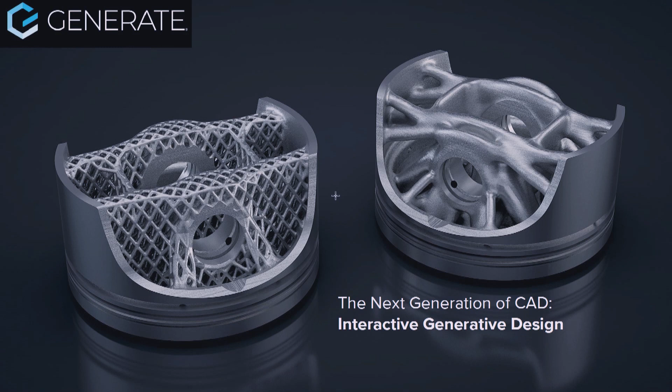So what I'm going to talk about today is how to make generative design interactive. It's a new paradigm of designing, and we're just scratching the surface. So we're really pumped up to show this to you. And I'll try to get through these slides pretty fast so that Kevin can start showing it off. A little bit about us. Yeah, we're in Boulder, Colorado. We're funded by a wonderful angel investor and also Next47.

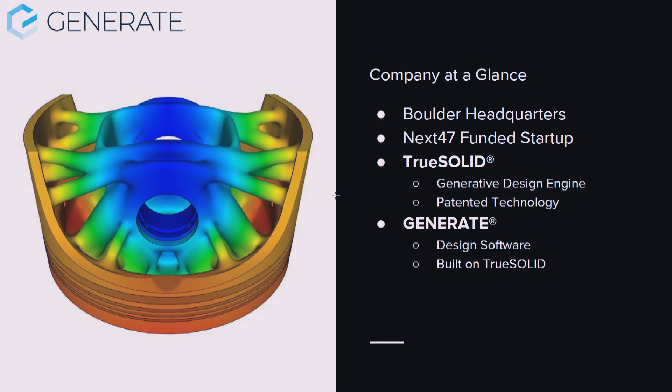And we have a patented technology which is called TrueSOLID, and that's our generative design engine. TrueSOLID is, at the heart of it, an implicit modeling kernel, which you've heard a little bit about today. And we definitely have some nice IP around that. Generate is our point solution product, and that's like our sandbox for experimenting with how to change the way we design things with generative design. It's built on TrueSOLID, and we just kind of differentiate between these two brands so that we can keep some sanity as we move forward here with the different technologies.

But what we're really after here is not just making it interactive for the sake of entertainment and playing with the design while it's being generated, but making it functional. And that's why we've created our own geometry kernel and generative design engine, TrueSOLID. The output from TrueSOLID is 100% manufacturable, whether you're using a 3D printer or if you're going to go and cast the part or mill the part. And we have constraints for all of those. So we're not just going to be showing you additive manufactured parts today. We're going to show generative design for milled parts, cast parts, and additive as well.

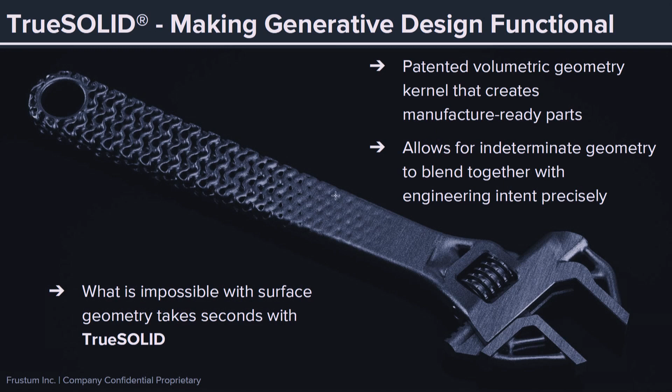So I think you'll see with this wrench design here, it'd be very difficult to model that with traditional surface-based geometry. So the idea here with making it interactive and using this new geometric representation is that you get a functional part right away, and it's your design process. It's not just automated.

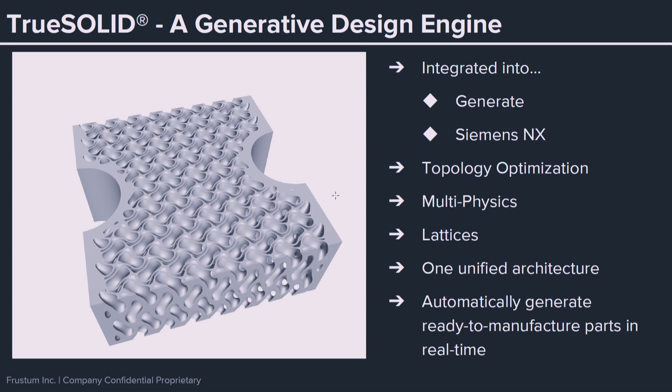And you can make amazing things like, for instance, this heat exchanger here. One of our larger customers in aerospace, who I can't name, sorry, I've got to go back one, is doing some really fantastic work with these types of complex structures that have unique performance capabilities that we're just scratching the surface on. It's a multi-physics system, so we do simulation too. It's all multi-threaded on CPU and GPU. And it's for that, giving you this more interactive and real-time experience.

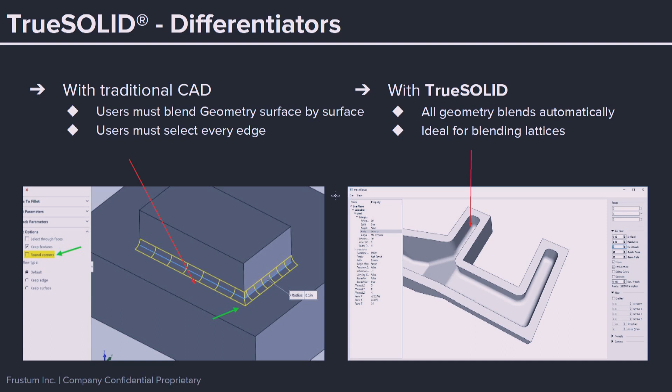So just a little bit about what's so different about traditional 30-year-old CAD geometry kernels, which are surface-based, and TrueSOLID. If you are using traditional CAD, you know you have to select edges to blend between geometries. But that doesn't work when you have thousands of lattices or struts or complex structures like this gyroid from the last slide. It just breaks down because you can't go in and manually select all of those. It just wouldn't work. So with TrueSOLID, you can apply blending between volumes without selecting them.

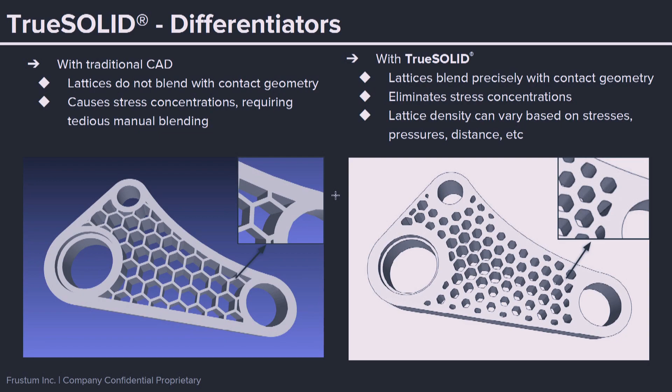Additionally, in the current state of the art right now, if you use traditional CAD, you're going to get these seams here, which would have to be blended if you want to get stress risers out of the part. Whereas in TrueSOLID, all that blending is just a parameter which you have total control over. So in a new way, it is parametric, but what we would just call functional design. So it is functionally parametric. You specify functions by parameters, and you get the design that it is providing for you.

We're all familiar with topology optimization. There's so much debate about what's generative design. Does generative design have to be on the cloud? Absolutely not. That's our position. So does generative design have to be on a local computer? Absolutely not. You could run it on the cloud. The reason for choosing one or the other is not really our debate. What we are saying is we just want to leverage all the computing power we have and use it for

the best purpose possible. So the design on the left is what you would traditionally associate topology optimization with, which is a really excellent part of generative design. Except that if you're a designer and you make a change to this or move the cylinder or make it bigger, you would have to then go and use this template it gives you to redo all the modeling. In our system, you don't have to do that. If any of this changes parametrically or the physical requirements change functionally, it all just updates for you interactively.

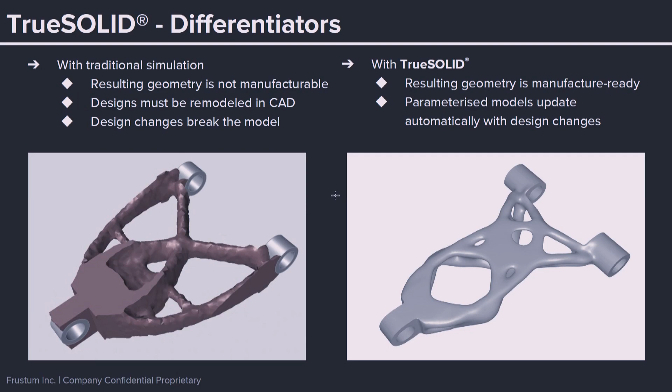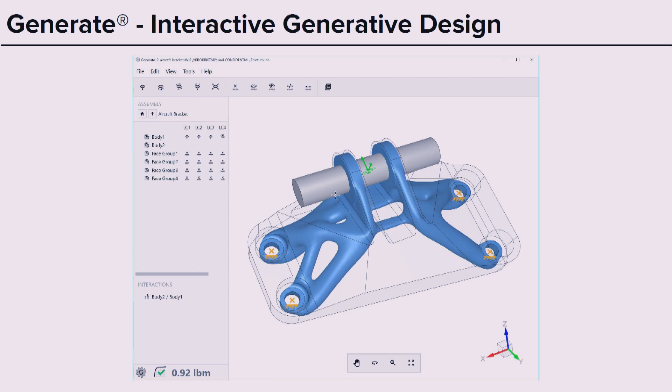And you can make some fantastic variations on these designs with your own control over it interactively. So you can make your own judgments and values based off the experimentation that you're doing with the design without needing to have a large automated process running it for you. So here, this is unconstrained and good for certain additive manufacturing processes, maybe DMLS. Here we have something that could be water jet. And again, this is not modeled. It's 100% automated. Here would be something that could be good for casting or perhaps even a fused deposition approach.

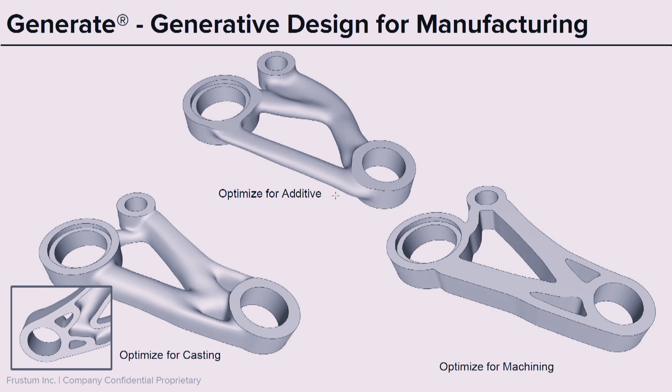And again, we can fill these with lattices for further lightweighting, gyroids, et cetera. We have a lot of variety on those types of technologies. So when someone might say they're the only one doing this type of technology, I assure you there are options out there. And what you'll see, I think, more of in our industry right now is more ways to design and work with such complexity. And that's a challenge we have as an industry, one we're really looking to solve and make easy to use for you.

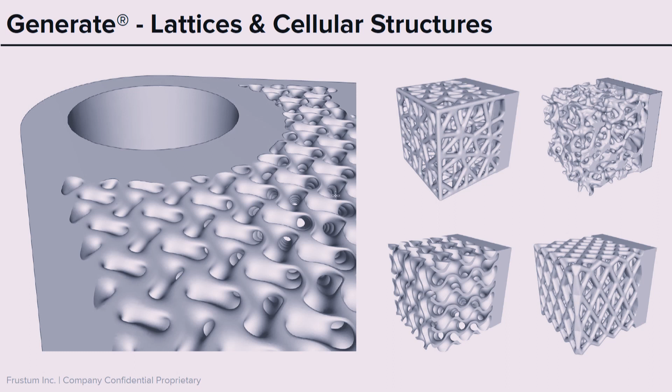So with all that said, I'm going to toss the ball over to Kevin, and we're going to get a demonstration here. I'll just note that it's generally available right now, and we've been in a beta for a period of time, but it is generally available.

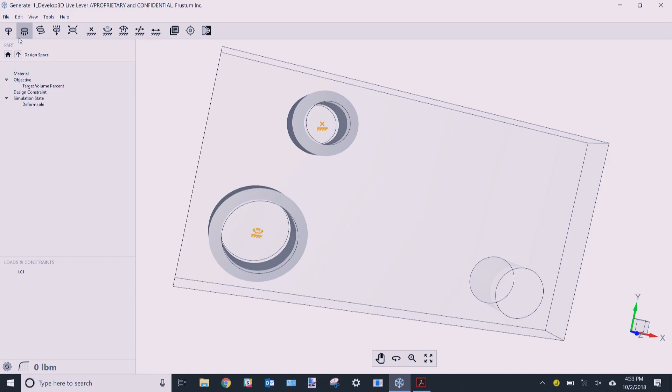So I'm going to start with a pretty simple setup. I've already got a few things constrained. We're going to do a few things first. First, we're going to create interactions. So you can see as part of generative design, we want to preserve certain bits of material. So in this case, I might want to preserve these holes within the part. So in other words, if I have some pins passing through there and I hide those pins, what's left behind is sort of these little collars.

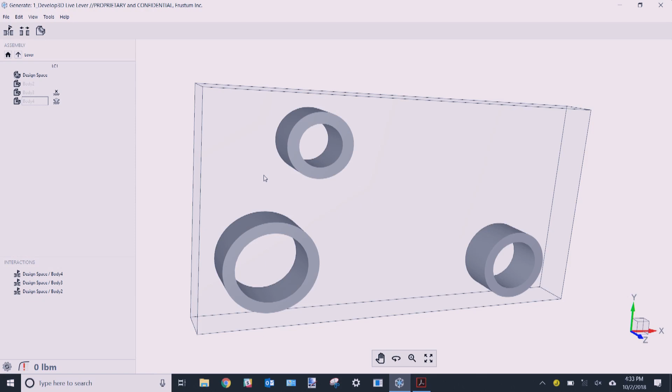So these are the bodies. This is sort of like my starting geometry. Now I need to fill in and connect these based on the loading conditions. So we'll show those again. And then we're just going to go in and add a simple force, complete the load case here. So we're going to pick a direction vector, in this case, that edge, apply a load, start load case.

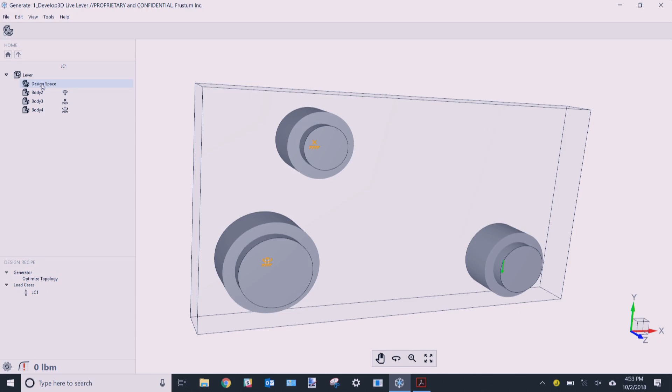And then, as Jesse pointed out, one of the key things about Generate is this notion that it's interactive. So what we mean by that is, as opposed to the cloud solution that we have currently, which is great, this one allows you to see your results forming in near real time.

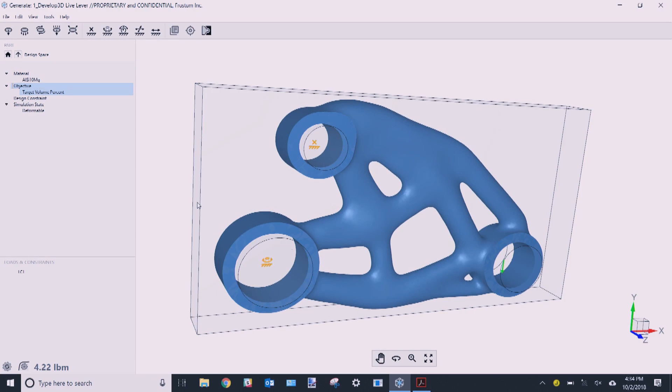Now, I'm using a laptop here with a sort of a medium level CPU and graphics card, but imagine using this on a really high horsepower CPU, high-end machine, and you'll see these updates. You can kind of tell it's running right now, and this is not the video, this is actually us just processing. In this example, we've got no design constraints, all right? We've just let it sort of be free.

This is what we would call our sort of designing for additive manufacturing. So if you're gonna do a powder-based metal printer, you're not worried about supports, something like this would work really well. If we wanted to, we could also view our stress at any time. So we have this continually updating stress plot. We could view our displacement.

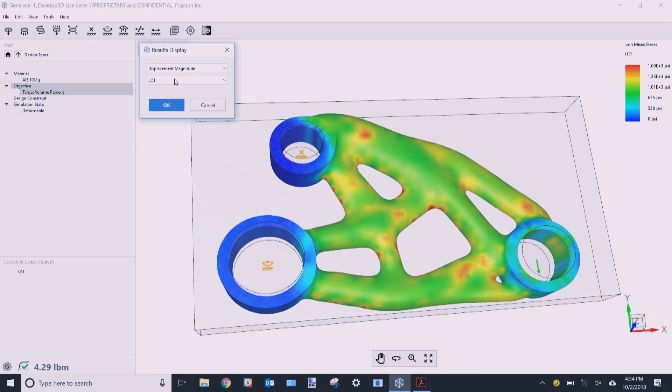This is a good sanity check to make sure that you've got your load case set up properly. So you can kind of make sure that, yes, that's the direction vector that I wanted. I would expect that sort of motion. It's obviously sort of exaggerated here. And then we can go back and start considering making some design changes.

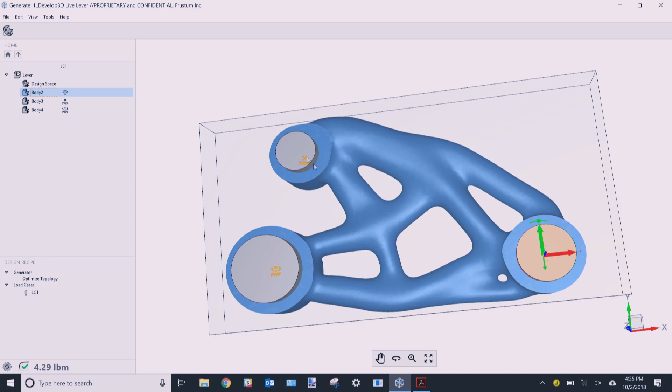So for example, one design change might be, I might want to move this pin. I might want to experiment a little bit. Now, traditionally you would think, okay, I might have to go back to CAD, transform that body, export it, re-import it. But we're gonna allow you to move components around to do design studies. So if I wanted to just move this pin up about 2 inches, I could either key in a value, or in this case, just drag it up.

And the system says, hey, I have new conditions. I need to regenerate. And so off it goes, and it starts to solve again. You don't have to wait. You can keep going. You can make other design changes. You can say, okay, well, I want to take a look and see what it looks like if I was to add, in this case, an extrusion constraint.

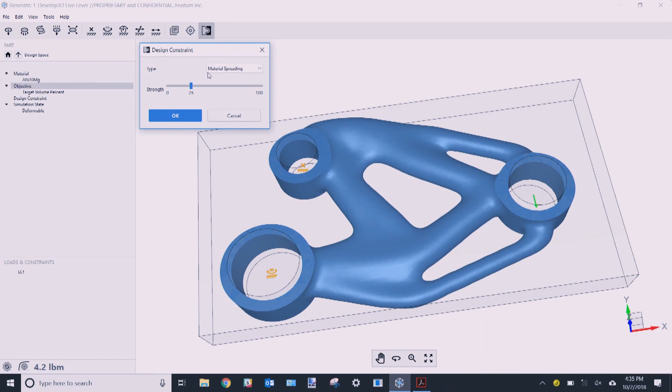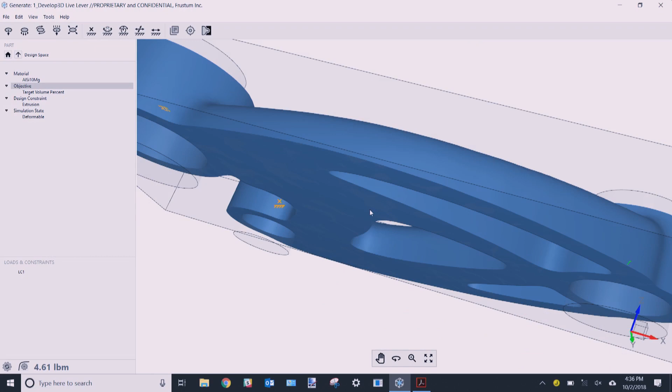So as Jesse was talking about earlier, you saw some examples. If we were to apply what we call a monodirectional extrusion, this would be great if you're trying to minimize support structures. So now again, it starts over, obviously has to use those bits of preserved material around the hole locations, and then it starts to solve within that, but you see one big difference is it's flat on the bottom. So we're trying to minimize, if not completely prevent, any kind of overhangs.

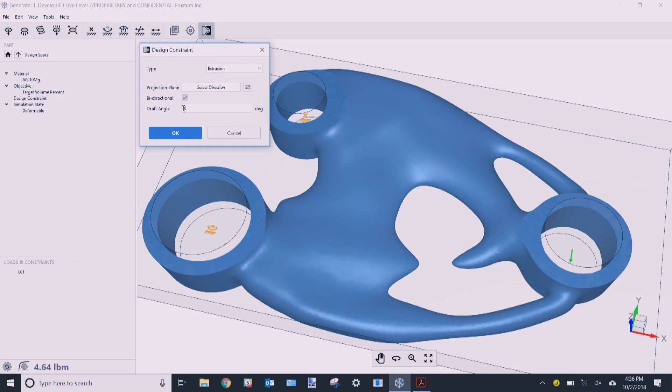So this will run for, again, another few seconds. At any time, we can get an update on what our mass is relative to what we started with. So in this case, we've reduced the mass by 75%. All right, and then we could try other design constraints. We'll do the same extrusion constraint, but this time we'll do what we call a bidirectional constraint. So if you remember from one of the slides, it had sort of a water jet type profile, a 2D profile. We can do that as well.

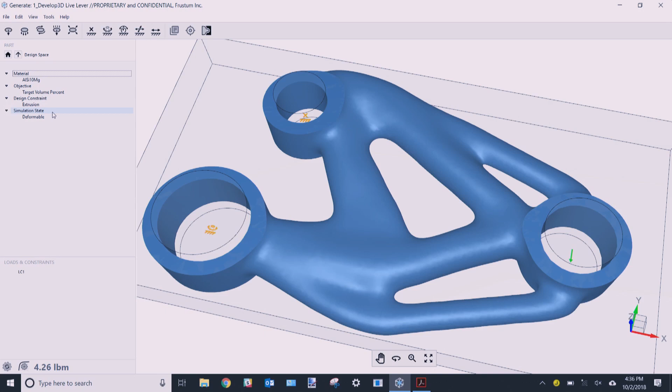All right, so it'll delete the previous extrusion constraint and start to regenerate using that extrusion. And then, really the key thing is we can move parts around, we can change parameters, we can change materials, change the forces and load cases, all kind of in real time, and you get those updates. You can also do things like symmetry, obviously, your angular symmetry, planar symmetry as well.

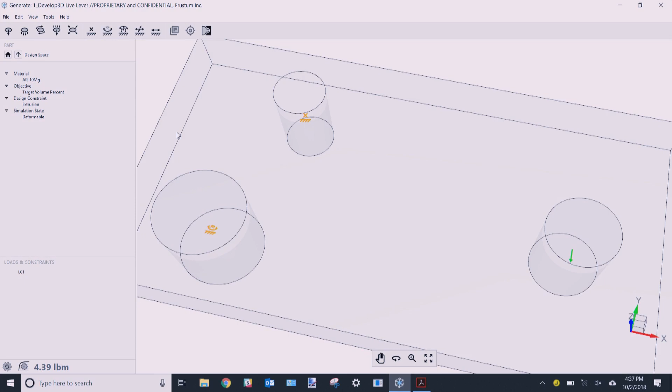But this is what we feel is going to really be what changes the game in terms of design, because you want to be thinking about how you're going to manufacture parts. So imagine now another release from now or 2 releases from now where you're able to actually not just dictate a constraint for the manufacturing type, but maybe the type of machine you're going to use. Getting into specifics, pulling a list of libraries from the printers that you're going to use and knowing what their build process is. So this is just an example of a 2.5D style profile.

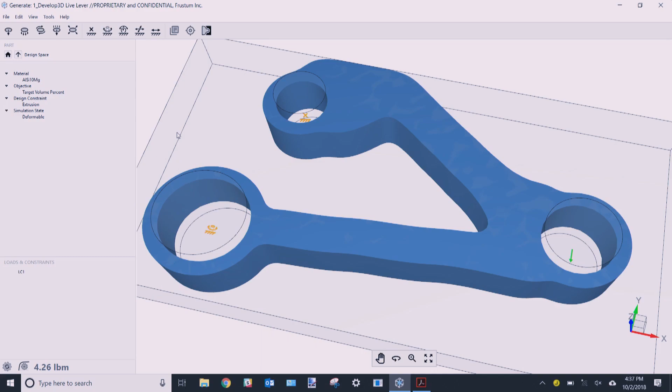Any other comments before I roll into TrueSOLID? No, I think let's just show the draft constraint. So we want to show one more constraint, which is, how do I put it? Very exciting for us because it automatically makes the part draft castable. So what you'll see is an automatically generated parting line.

It takes a little bit of time to process because if you imagine these algorithms are figuring out how to make it manufacturable for you, it's an exciting use of it, but it takes a little bit more time to process. So I'll just talk a little bit about the vision of it as we're going forward. Really, we see this right now being useful for all manufacturers, especially if you're thinking about 3D printing fixturing and tools.

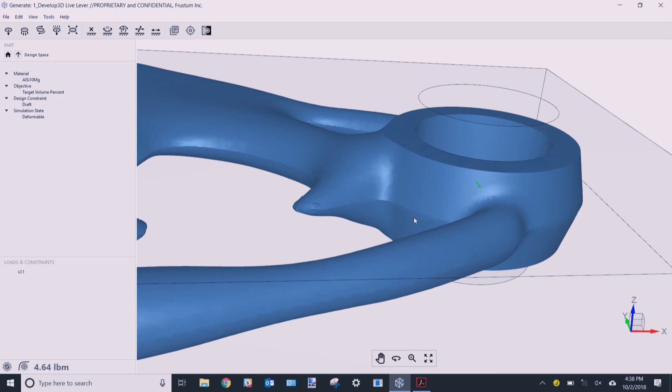Some of the constraints we showed you had the ability to do, oh yeah, it's starting to generate now, but here you can start to see the parting line emerging on the design right here, and the 15-degree or so draft was applied. So as the geometry updates, it'll converge to a manufacturable cast part.

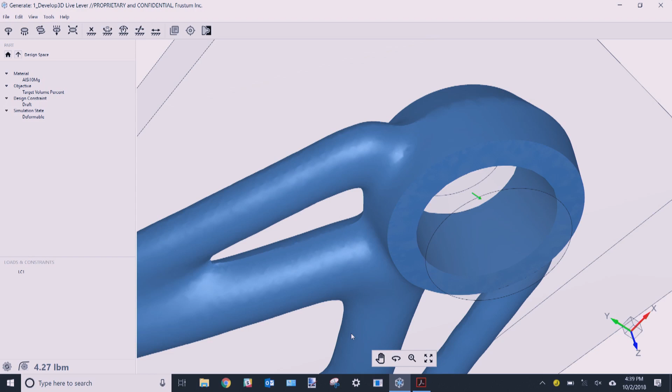But the idea here is that we want to allow you, like Kevin was saying, to have your variety of machines at your shop all be part of the catalog of constraints at your fingertips. And you can kind of customize the software accordingly. So with that said, we're going to also show you a little bit more about what's coming up next. And to that, we're going to open up our developer interface and bring that design in.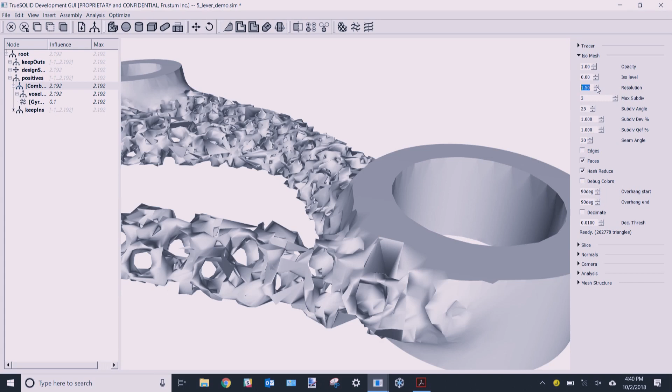And the important things to point out here are things like the blending of this gyroid structure back into sort of that regular prismatic geometry. So you can see how we have full control over that blending. We can change it, we can make it larger, make it smaller, and that's really sort of the power of TrueSOLID modeling. One other thing that I think is really cool and that we found a lot of applications for with things like footwear insoles for shoes would be modifying the density of the lattice or gyroid structure based on pressures or based on stress values.

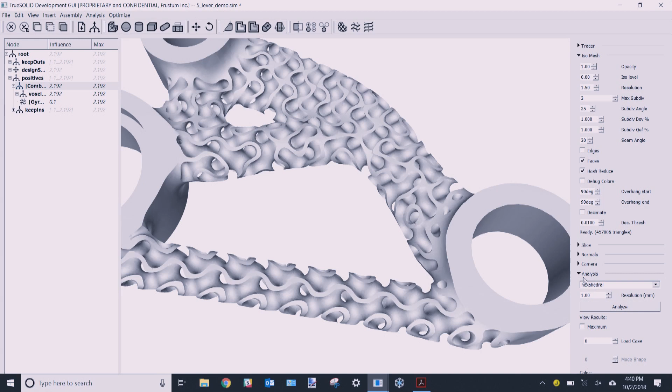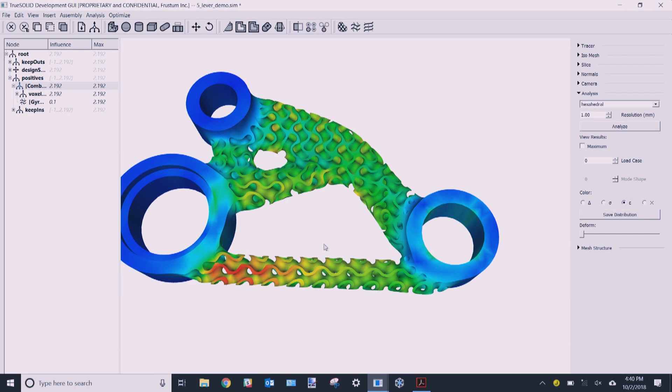So in this case, if we take a look, we've got some stresses here in the part, some strain rather, right at the top. So the red areas are areas of highest strain. And what we might want to do is inform the geometry to thicken that up. So in those areas of high strain, let's use that to thicken that up. So in this case, I'm going to set my deformation back. I'm going to turn the colors off for a second. And then all we got to do is save out that stress plot as a distribution field, or thickness field we call it, and load it back in.

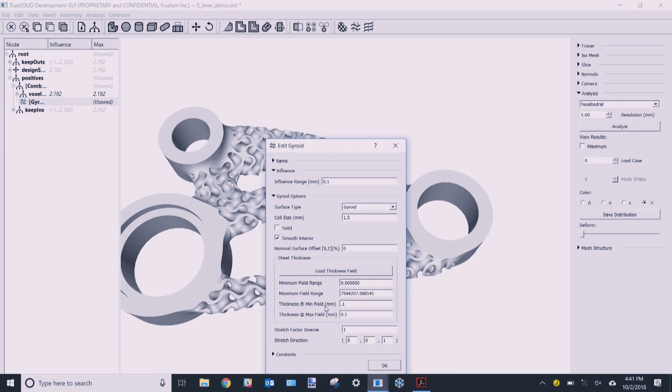And once we apply that, we can then dictate and say, okay, at areas where the stresses are lowest, it will be relatively thin, and areas where the stresses are high, make it a little thicker. And so what you'll see here when it's done rendering is you've got sort of thicker geometry here, and it kind of helps to overlay the color on it. And you can see that very clearly down here at the bottom too. So you've got areas where the infill is a little bit thicker.

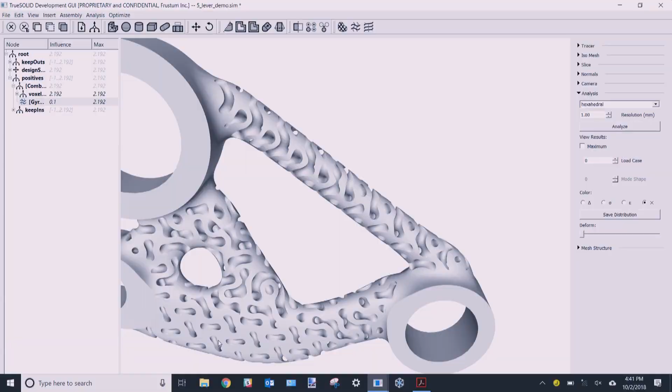Almost, you can even make it go to the point of being solid. You can fade that in. And we found a lot of utility for this sort of variation of the lattice densities and patterns. And these lattices can be internal shelled structures, or they can be open in certain areas. You'll have full design control over working with what we call TrueSOLIDs.

So at the heart of our company, we are working on this interactive generative design for manufacturability. To close the loop on this, we'll just show you how easy it is to slice from volume data directly, where you don't even have to have an STL at this point. We have numerous relationships we're working on right now to really streamline the process of getting the data from the software to the machine that you're using, to your CAM. And this will be the same for milled parts, additive manufactured parts, et cetera, as we move forward.

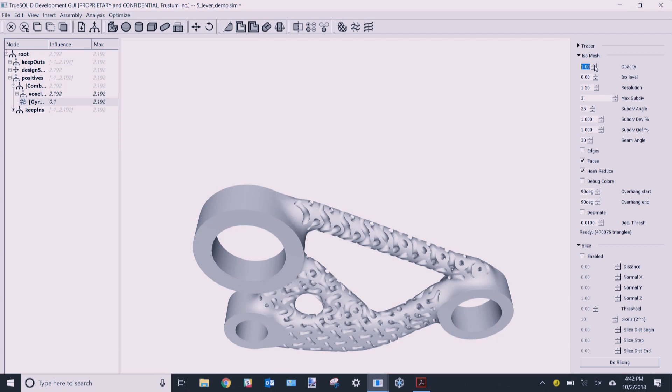So I guess just to close things up, we really are just showing the beginnings of this. We have the ability also to do full-scale assemblies, so you can do multiple parts at the same time. And we'd love to demonstrate some of that to you at the booth as well. They run a lot longer. They take a lot more time. So we chose to just focus on one part.

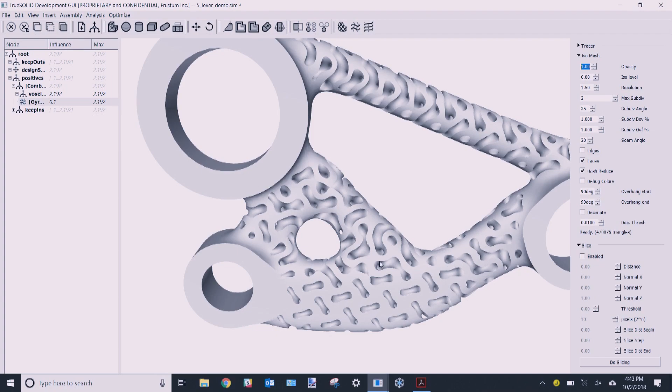But we see this future that we hope we are pioneering, all about putting the designer in the driver's seat for generative design and not turning it over to an automated process where you sit back or go get a coffee. So we want to keep the designer front and center in this new age of designing with generative design.